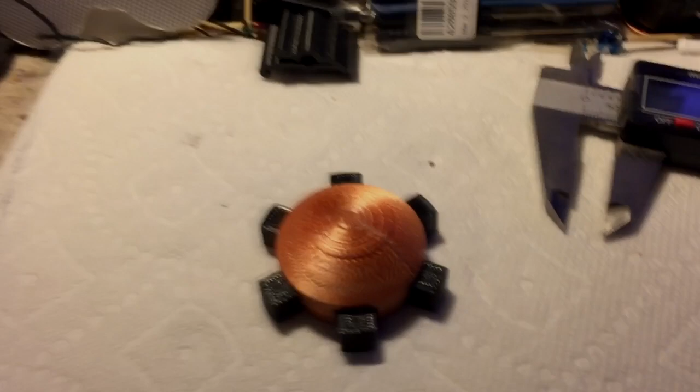Okay, on to finishing the pommel. This will be the last part of this pommel series, I guess, if you could call it that. And we're going to design things a little different. So as you know, our pommel now is solid. It's not a cap like on the toy. In parts 1, 2, and 3, we did the threads, we did the pommel, did the ring to fit over the lightsaber, and put it all together. Now we want to complete it.

So the next step in completing is building these little squares that come out of here. Now on the toy printed lightsaber, they're just glued on. So these could be easily knocked off. If you hit these hard, they're going to come off. It's just super glue, right? So since this is solid, the design idea is to make these go into the pommel farther to give it some strength. We'll still glue them in there so they don't slide out, but it'll give it some strength by going into the pommel.

Also, remember we scaled this from, I think this was 36 to 50, or actually I think this is 45 to 50. Anyway, 42. Anyway, we want to scale these up a little bit. So I measured these. These are 5 millimeter by 5 millimeter, and they stick out 5 millimeter. So what I'm going to do is make these 6 millimeter by 6 millimeter and make it stick out 6 millimeter. And that way it scales because we scaled this up. So that's what we're going to do. We're going to kind of keep it like that.

I may also do some rounding of these edges because this is going to be on your lightsaber, and we don't want to hit this and get nicked, right? So might round some of this stuff. We'll see as we do the design. Anyway, that's the idea. Let's get started.

Okay, on to completing our final pommel. Now, in the first segment of this video, I told you that these were 5 by 5. They're not. They're 9 by 9. My mistake. And they stuck out 5 millimeters. I don't want to change how far they stick out, but I do want to scale it up. So I'm going to just go 10 by 10.

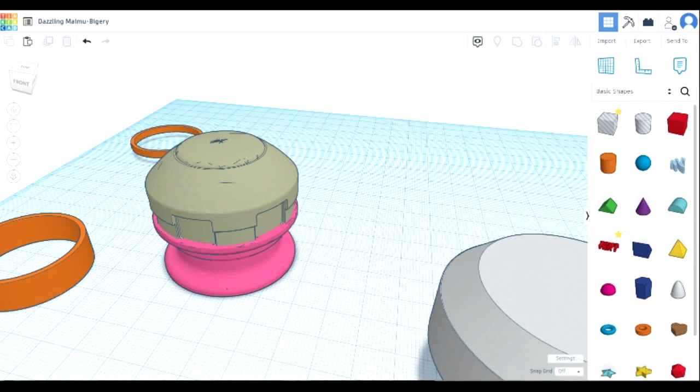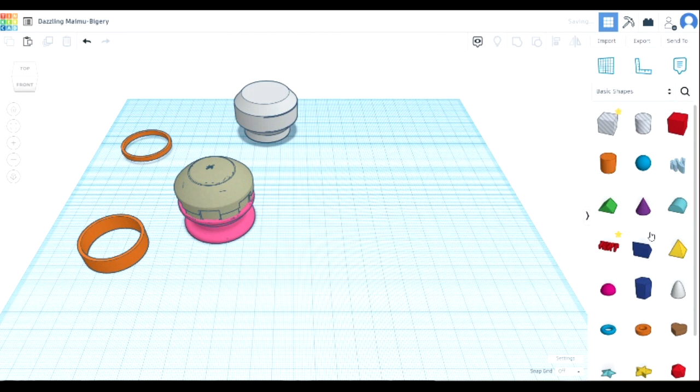All right. Now, there's 5 indents total. Is it 5? 1, 2, 3. I think it's 6. 6 indents total. Yeah. So that means in a 360-degree rotation, there's 3 of these. If you were to look at this as a bar going through, there'd be 1, 2, 3. Whoops. So what we want to do is, let's get this out of the way, we're going to do a trick. I call it a trick, but we're going to do this to make it real simple. So we're going to put a solid on here.

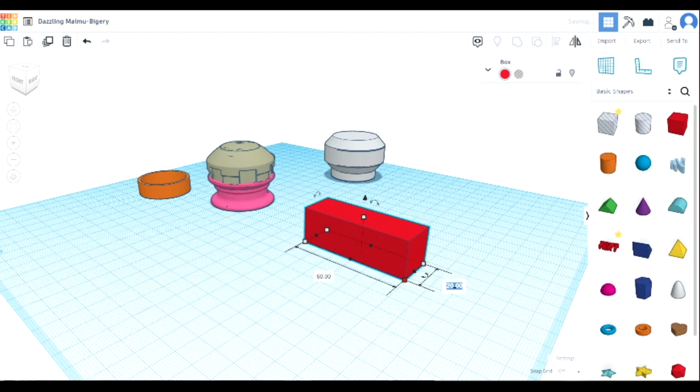Now remember, the diameter was 50, and we want the parts to stick out 5 millimeter on each side. So the first thing we're going to do is make the length. So 50 plus 5 on each side is 60 millimeter. All right, then we said we want to make this 10 and 10. And there's our first bar. And if we were to put this through here, you'd see that it would go right through and stick out 5 millimeters on each side.

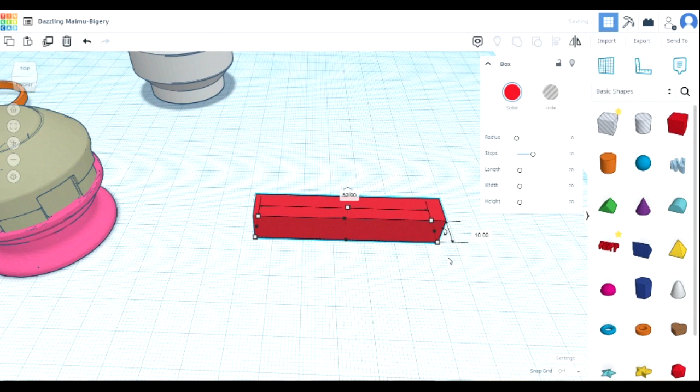All right, great. Now, I said I kind of wanted to round this, so let's take advantage of some of the tools Tinkercad has. So let's put our steps up so it's smooth, and then we'll just start to bevel this guy. Let's see what it looks like. That's pretty good. Now, the way the bevel works is it gradually goes back. We don't want to bevel it back into our pommel, so we don't really want more than about 5 millimeters. If you see, if I do this, it becomes like a pill shape, right?

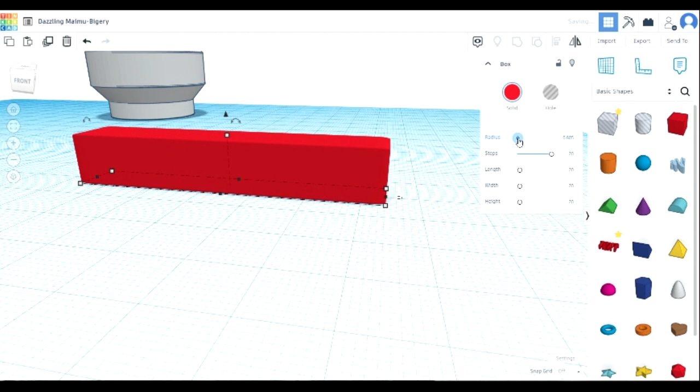So we want to do it just enough so we get a nice gradual bevel, but it isn't too deep into the pummel, leaving a gap. I think that'll do it, and you see it did it on both ends, so I think that's good enough. That gives us a little bit of a rounded edge on that.

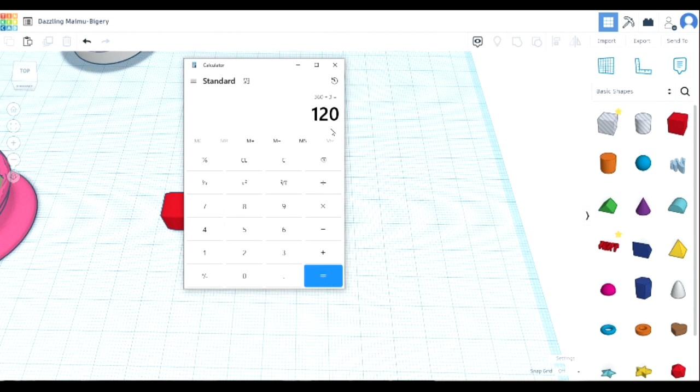Okay, so now we need to duplicate these and rotate them. So let's break out Mr. Calculator, even though you really shouldn't need it. 360 degrees divided by 3 bars. That means we need to rotate each part 120 degrees.

All right? So we're going to take this, we're going to hit the duplicate button, and I do it that way now instead of hitting Control-C, Control-V, because it puts it right on top of the other one. That way we get perfect rotation. So you need to deselect and then select, so you're only selecting one of them. When you duplicate, both are actually selected. So if you don't do that, you'll wonder what happened to your part.

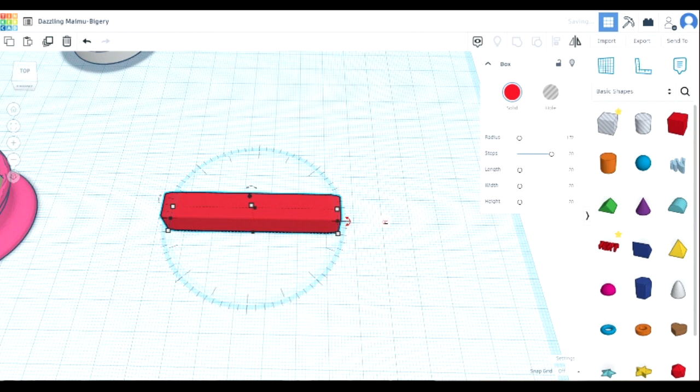Unselect it, select one, that way you've got one. Now we're going to come over here to rotate, and we're going to rotate 120 degrees. And there we have it. All right, now we're going to select this part.

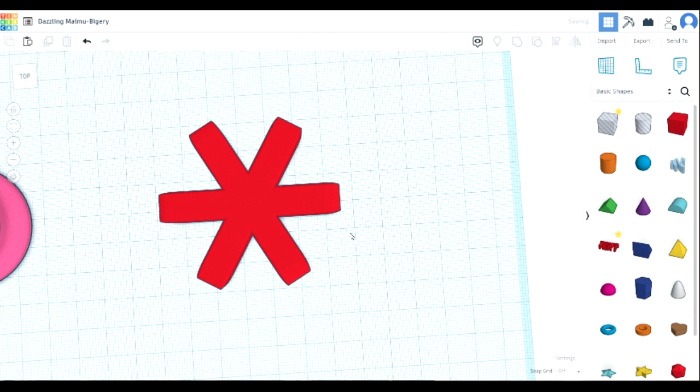We're going to duplicate again. We're going to select one of them. And once again, we're going to rotate 120 degrees. And look at that. We've now made this perfectly symmetrical. All right, I'm going to group all these.

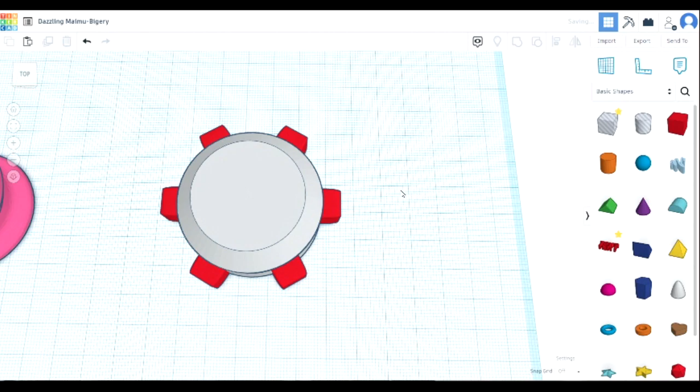And you'll see if we bring our pummel in, and I'll just go ahead and drop it below the build plate for now. And then we do a center. Bingo. All evenly placed around. Not a lot of work doing one by one and trying to get it evenly placed. And we've got our decoration on our pummel.

All right, so I'm just going to undo, get the pummel back over there. All right, so now we've got this. So this is actually going to be our part. I'm going to unzoom. So I'm actually going to put this to the side, but I need a duplicate of it. Why? Because we need to make holes in the pummel. Actually, we're not done with our part. Pardon me. We would never be able to get these parts into the solid pummel.

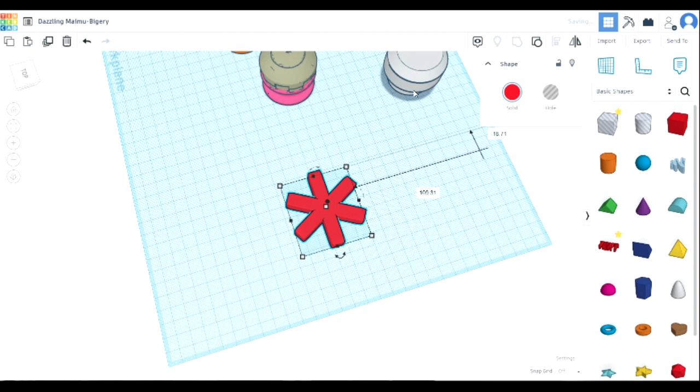So what we need to do now is, let's get another circle out. Actually, I'm going to make it a hole. And we need to separate them. So how far do we want them to stick in the pummel? First, let's bring up the sides and put it in here. And obviously, we need it bigger. Want it to stick into the pummel a little bit, but not too far.

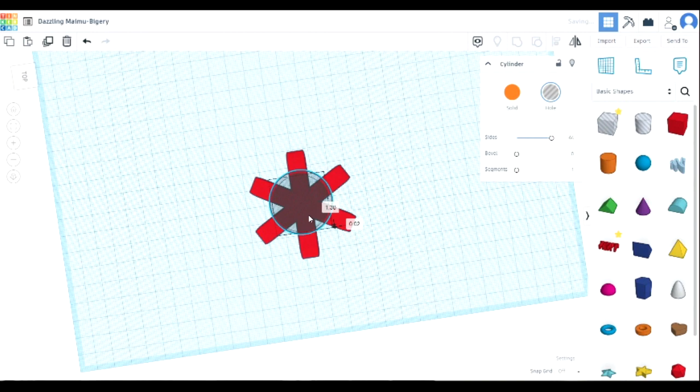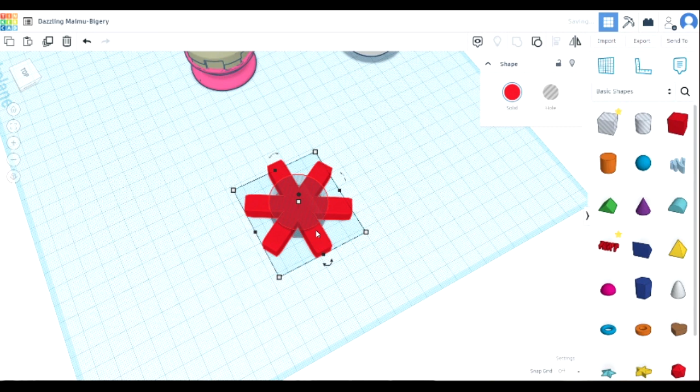All right, let's go ahead and we can lower that a little bit. Don't need all that. Okay, let's center these parts and combine. Now let's see how far they do stick into the pummel. Wait for it to finish. The more and more stuff you get on your build plate, the longer some of these commands take. So that looks pretty good.

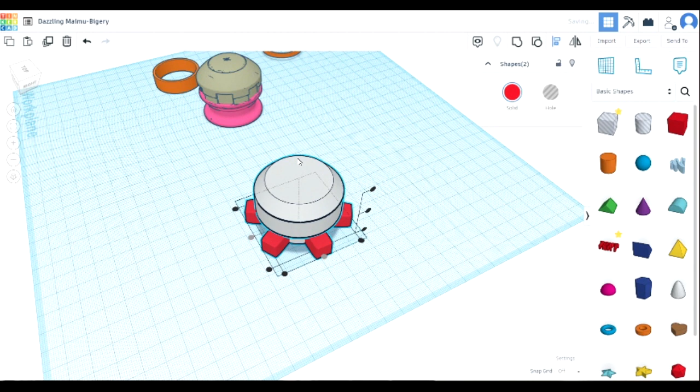Let's see how far it would stick into the pummel. So let's center. Or align. Okay, drop the pummel down. Get an idea. Now what I'm going to do is I'm going to make the pummel transparent so I can see how far they stick into the pummel. That's quite a distance. That should be pretty secure. Could have made it maybe a little bit bigger and have them not stick in so far, print less material.

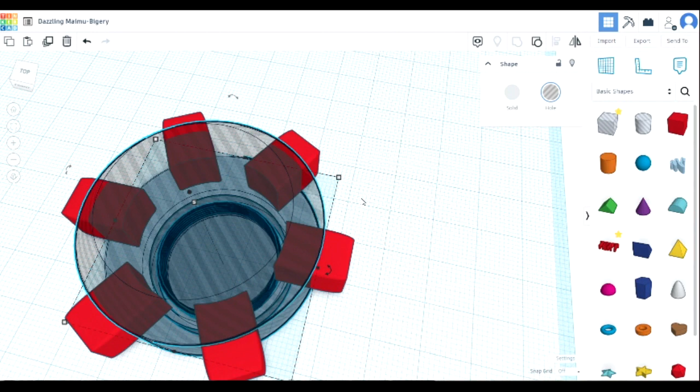Tell you what, let's go ahead and do that. So we're going to select this part again. We're going to hit ungroup. Let's see, how big is our circle now? It's 32. Let's make this 34 by 34. Okay, center, align, like so, group.

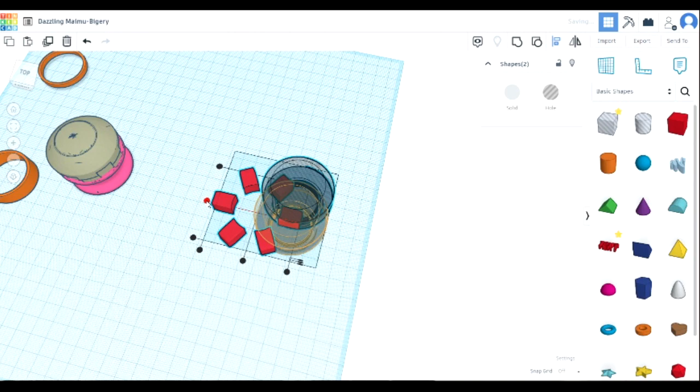Again, more stuff you do on the build plate. That's why, in my opinion, it's better to do piece by piece on different build plates so you're not slowing yourself down waiting for things to complete. So let's go ahead and align. And let's have a look. Yeah, I could keep from going in a little farther, but I think this is going to work out. I think this is going to be fine.

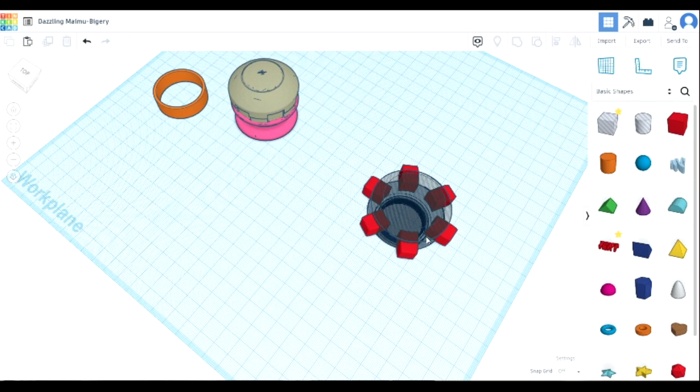It's not that much plastic for those little parts, but you could make that circle even smaller so that they go in, but we're going to make them secure, all right? So we got our pummel. We can go ahead and make that a solid again. We've got our part, which is all combined, so we can stick that aside.

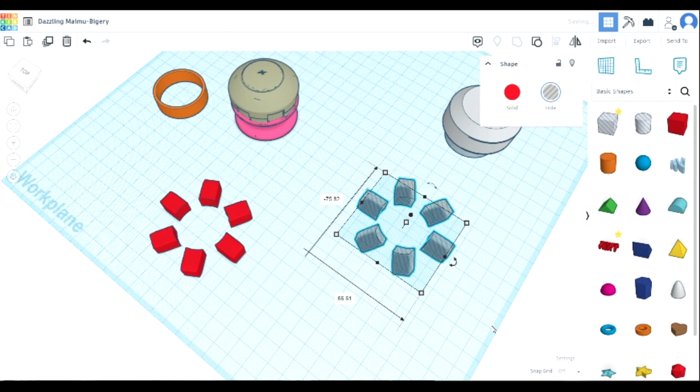Now, I need a copy of this because now we got to make holes in the pummel, right? So let's copy it, paste it. This will become a hole. Now here's the deal. Once again, when you're 3D printing things, you may get a little bit oversized here or a little bit undersized on the hole, and then your part won't fit in the hole. So what you want to do is increase this a little bit, just a little bit.

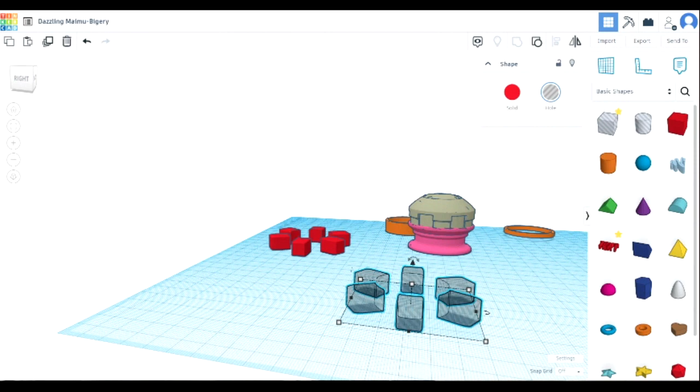So if we increase it up, it will be good, but if we increase it to the side, these will become longer, etc., and we won't get what we want. We need to increase the whole thing. So what I'm going to do is I'm going to ungroup, and move our hole. Whoops. Come on. Move our hole out of the way. Ungroup. Guess I didn't have that ungrouped.

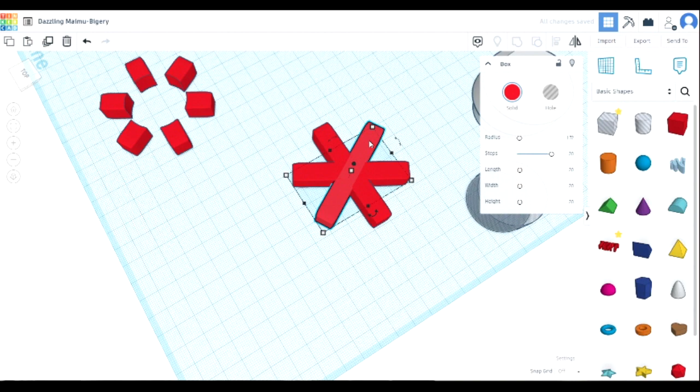Move our hole out of the way. Then we're going to ungroup each of these bars. We're going to ungroup this whole thing and delete these bars. All right. Then we're going to unbevel this because we don't need the holes to be beveled.

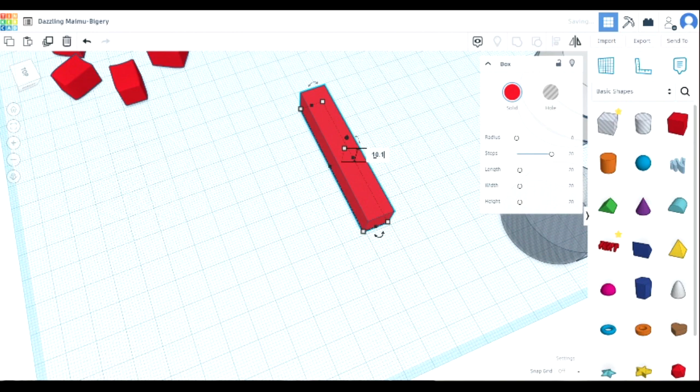All right. And we're going to make these slightly larger. So we're going to make this 10 point... should I do 1? Let's do 10.1. Length doesn't change. We've got to make the height 10.1. And we're going to repeat the operation we did before.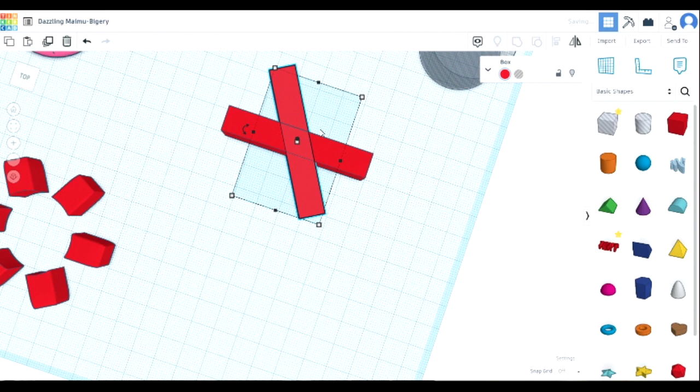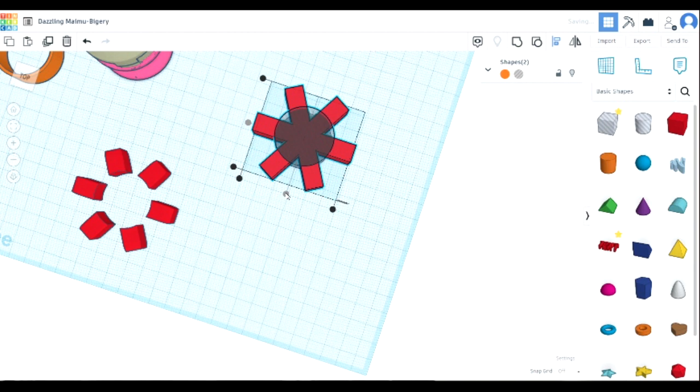Again, we don't need them beveled, so we're going to hit duplicate, select one, rotate 60. Okay. Duplicate, select one, rotate 120, combine, and merge our hole back in by aligning. That way the dimensions are the same. And then we combine again, and we make this a hole that's now slightly larger than our parts by 0.1.

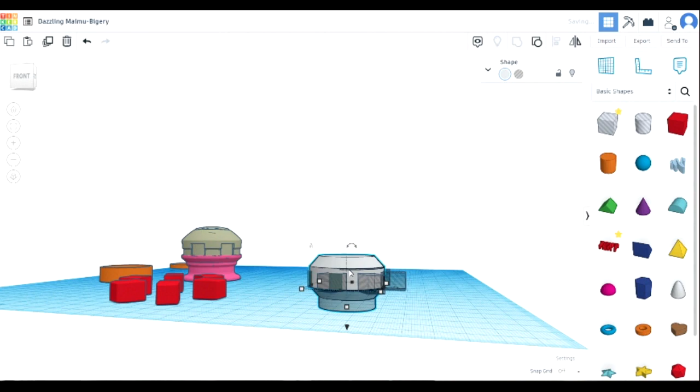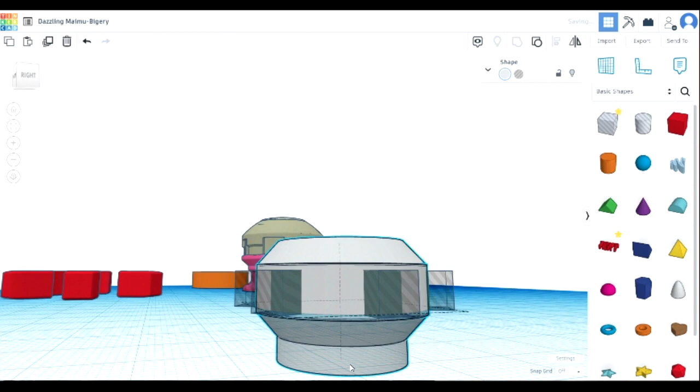Okay, now we need to put them in the pummel. Let me get home here. So we're going to take our pummel and we're going to lower it down and split the difference between the bevels. First, let's align. Okay, we're all aligned. But as you see, we're sitting at the bottom. So now what we want to do is raise our pummel or lower our pummel and basically split the difference. I'm just going to eyeball this. You can calculate it out, the distance between here. We need to go down a little bit more.

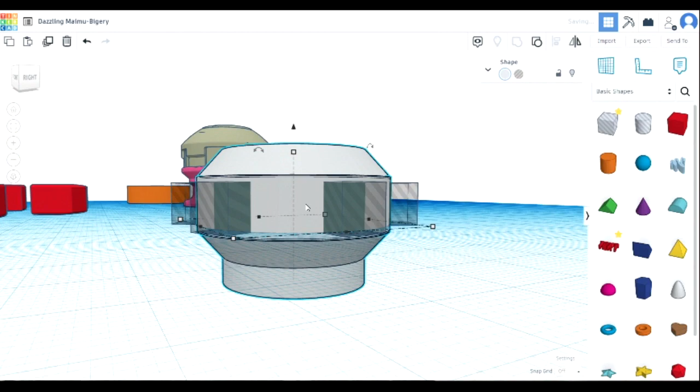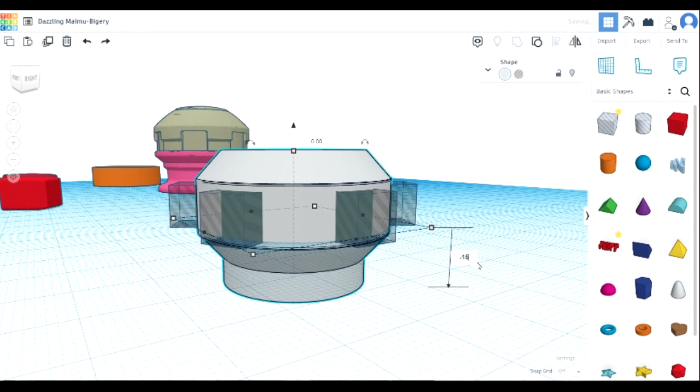Actually, let me recenter here. So we need to go down a little bit more, I think. Up a little bit. I don't know, it looks pretty good to me. It looks pretty good to you. I think down one click. So where are we at? 14.98. Just make it 15, see what that does. Oops. We're minus 14.98, so we want minus 15. Yeah, that moved it down a little bit. That looks pretty even to me.

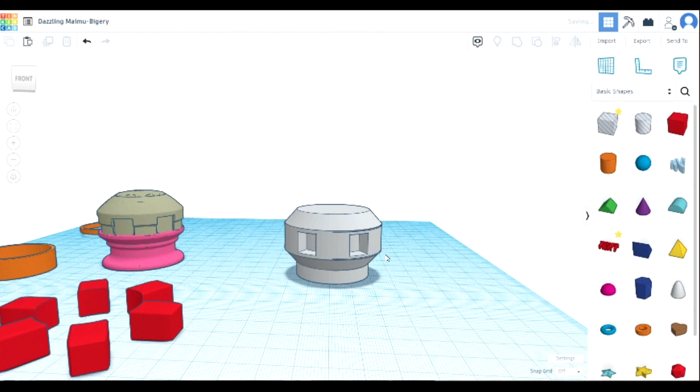So here we go. We once again combine. And let's recenter, re-level on our build plate. And there's our finished pummel and our finished parts. As you see, there's a back wall, so when they go in, they'll glue right in. Because we did this in circles, these parts are curved. And we know inside here, this is going to be curved. If we make this a hollow so we can x-ray view it, you can see these are curved. So I can literally take that part and put it in here.

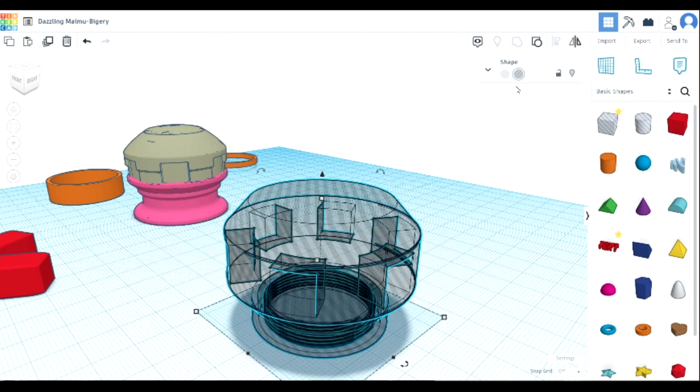Now, once again, I always say test what you're doing before you print the whole thing, right? So how do we test that? Well, we'd have to make a little test part to do it, which we can do. I'm going to put the pommel to the side. And what I'm going to do is take this, I'm going to ungroup. I'm going to ungroup again. And I'm going to copy one of these out. Okay. And then we'll just regroup all this again so we don't get lost.

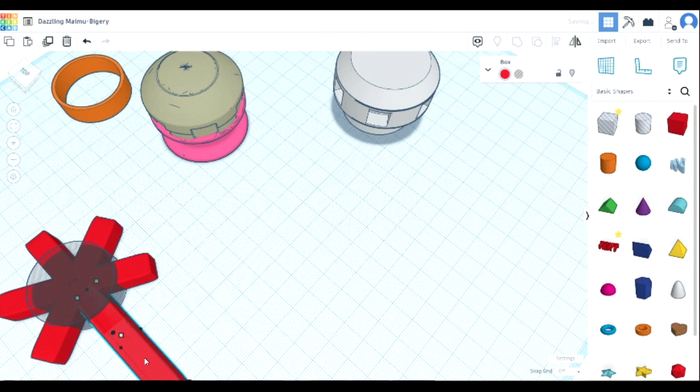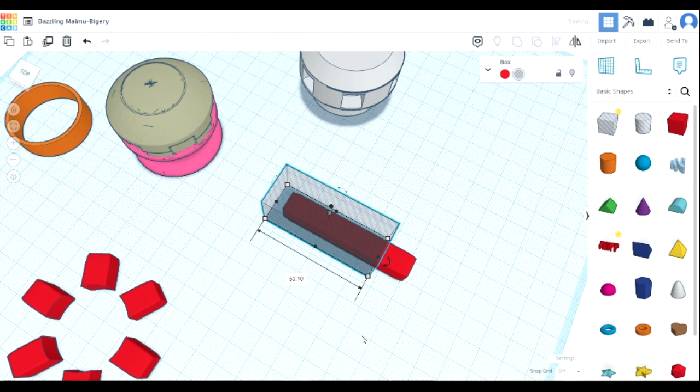Actually, I grabbed the wrong one. Ungroup. Alright, that's what I wanted, so we'll make a copy. Now we'll regroup. Now what I'm going to do is take a block. I'm going to slice this short, since we just need the little part. Okay. This is just a test fit. To do a test fit, we're going to group. Now we've got a part we're going to print.

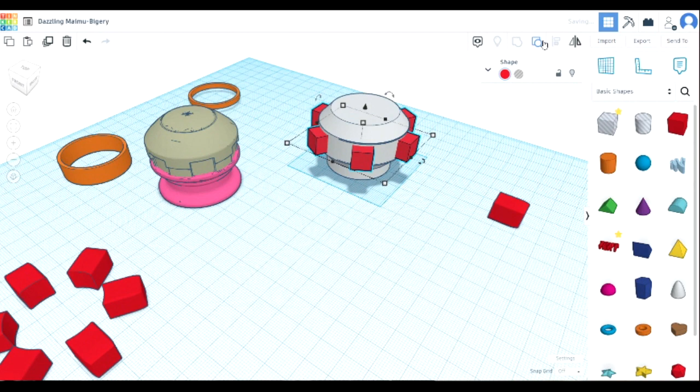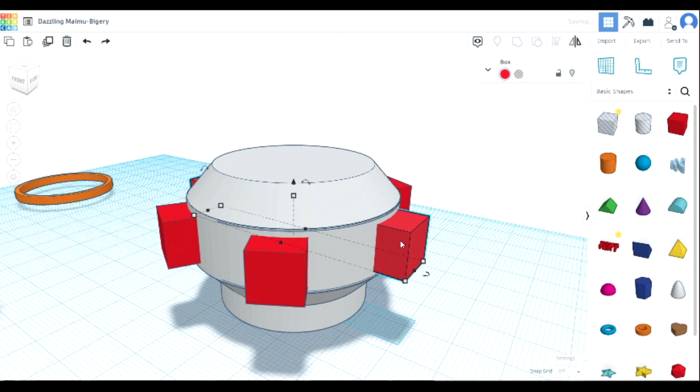And then for testing this, let me ungroup this. We said we made these bars. Ungroup that again. Ungroup. Recenter here. Come on, why can't I ungroup? Ungroup. Nope, didn't want that. So I should be able to grab one of these. We said we made these bars a little bigger to make the holes bigger, right? So I'm going to grab one of those. I'm going to hit copy and hit V. Pull that out. Okay, let's regroup all this.

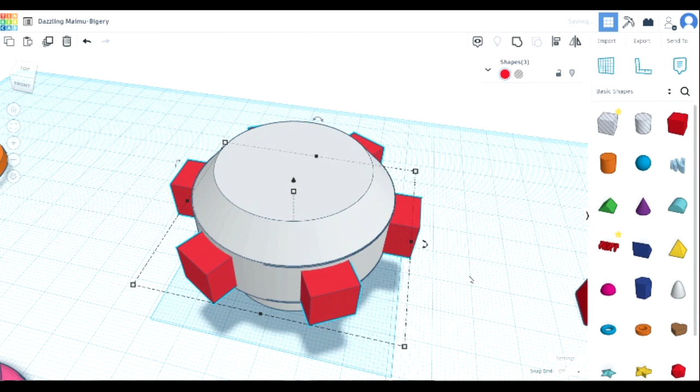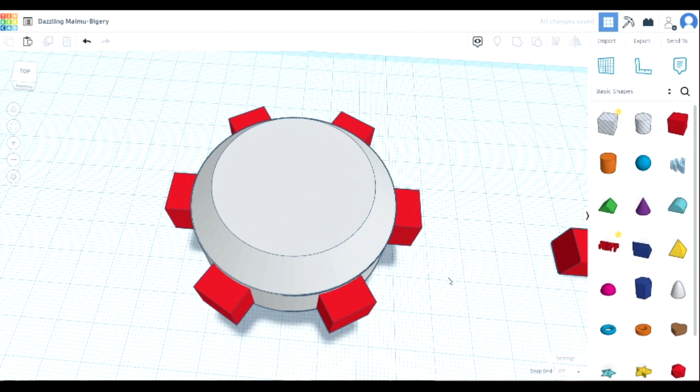Actually, we need to make this hollow again. So, got to do this the hard way. I should have made a copy before messing with it. That's one thing about making a copy. Okay, those are grouped. We need to make that a hole. Must be still grouping. Didn't get that grouped. Bear with me, group. Select, make it a hole. What the heck's going on here? Did I ungroup? I must have ungrouped. All right, I'm working too fast and I'm getting frustrated. Group. Okay, let's wait for it to finish. That's what I think's happening, I'm going too fast. And that's not grouped. Unbelievable.

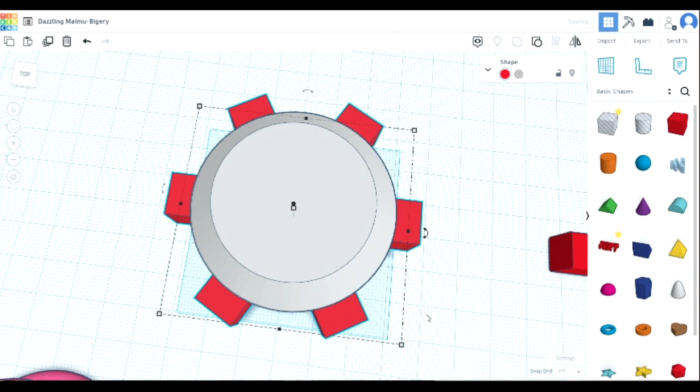Group. There, I see them all glowing. They look like they're all selected this time. Yeah, all right. And now we make that a hole. I hit ungroup, hit back. That's what happened. Sorry, guys, I'm getting punchy here.

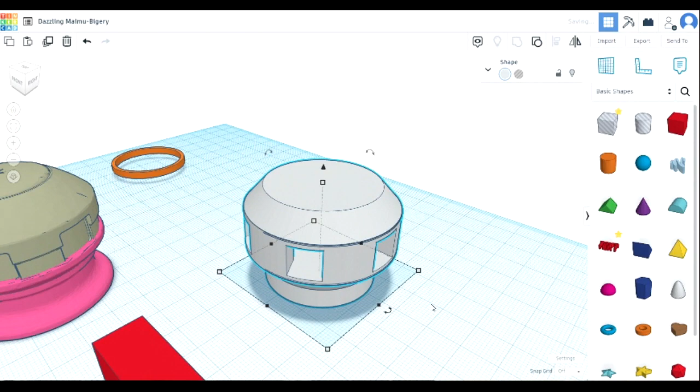We make it a hole, then we group it with the Pummel, and we leave our Pummel alone; next time we make a copy. Anyway, so where I was going was we now have this part that's an exact copy of that, and we have this hole. Let's make it a hole. So now we're going to grab a solid, and we're going to take this, and we're going to rotate this upright.

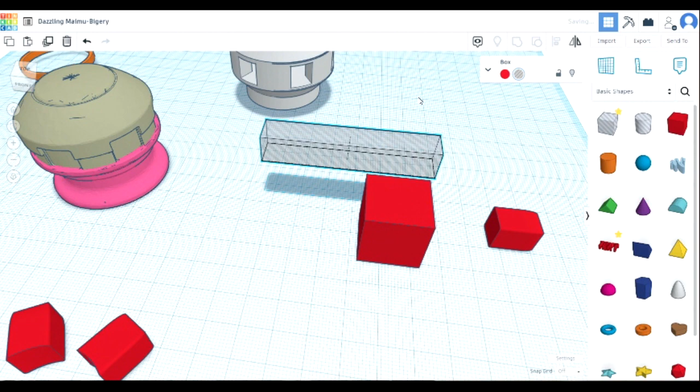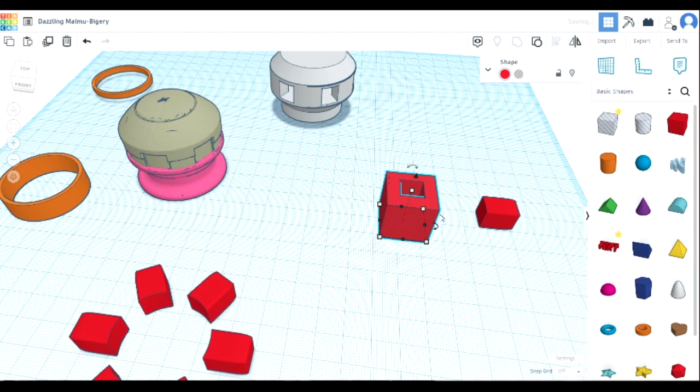Okay, put it in the center of the block, and then we're just making a little part we can test print, right? Bring this up so it's not on the build plate. Doesn't need to be that long. And how big is our square? Don't want to print too much plastic. That's good for a test print. All right, so then we're going to group. So we see it's got a bottom on it. We have our part.

And we're going to export both of these and do a test print to make sure this fits in that hole that we made as 10 millimeter, right? I could have, instead of ungrouping this, I could have just made it 10.1, 10.1. But what the heck, we used the parts we used. So I'm going to export these, and we're going to come back and make sure they fit.

Okay, as always, I say print a test part before printing the whole thing and then be discouraged. So this was the one where the hole is 10.1 and it's way too loose. Well, I wouldn't say way too loose. Put it this way, it would work, but it's loose, all right? And we want a good fit, make those parts glue in easy.

This one, I just went ahead, I said, the heck with it. I made the hole 10. I didn't add anything. And it turns out, because my printer's dimensionally correct, this actually is a good fit. It slides in and out, but doesn't wobble. So, bottom line is we're going to go back and we're going to make the holes 10 millimeter.

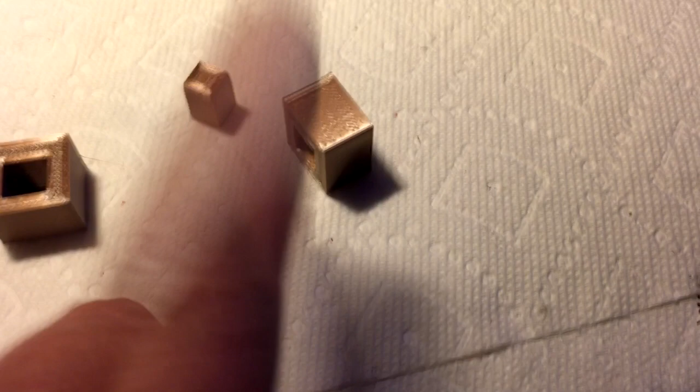Now, maybe it's because I printed it this way instead of this way. But here's the deal. If I print the Pummel and these are too big, I can always downscale these. It's a simple print. Whereas the Pummel's a much larger print and we wouldn't want to waste it. So, with that said, let's go back into CAD, fix things up, and then finish the Pummel.

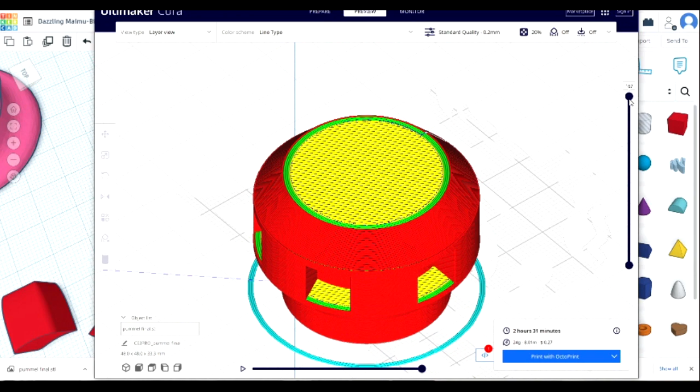Okay, so real quick, before we print this, I've got the black filament loaded. I don't think I'm going to do supports in here. Because remember, the part's going to go in, so I don't care what the hole looks like. But if you look, when I get on the first top layer above those holes, the printer's going to print the lines this way. I think it'll do the rim first though. Yeah, I still think I can get away without supports in there.

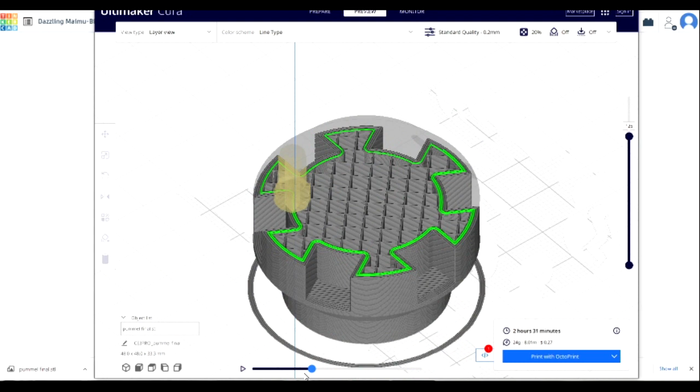Let me see what the print head does. So this little row down here is nice. You can see what the print head's going to do, right? So we're going to go to the next layer, 126, and we're going to watch what the print head does. I think it's going to do the perimeter. Yeah, it does the perimeters first, the inner infill, and then it's going to do the top layers.

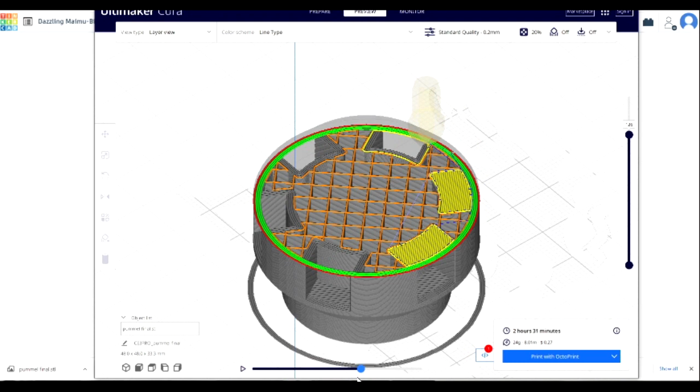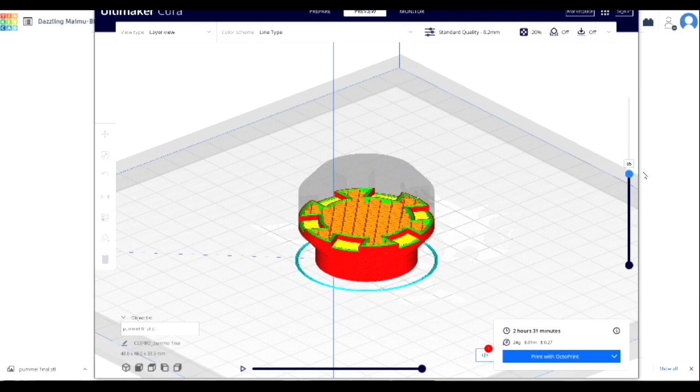And even though it's 10 millimeter by whatever depth I've got there, it looks like it's going to be fine. Yeah, I can get away without supports in there. Hate to dig them out anyway. All right, again, we try to do this without supports, but this is why you always want to load your part and inspect these things to determine, do you need supports? How big is the gap you're trying to bridge? Is there anything funny inside the model that's going to print weird or cause it to mess up?

And we are looking good now. So anyway, let's get these printed and take a look at the final Pummel. Okay, so real quick before we finish off the Pummel, I want to show you something. So when I first went to print these Pummel spikes, I guess you could call them, I just took the 5, and I'll show you in CAD and Cura. I just took the 5 and printed them.

Well, I forgot that I tapered the ends, and so here's what that did. On the build plate side, this was not touching the build plate, so we got this nasty looking edge. And then of course on the top side, we didn't get the cleanest edge either because it's the top layer, right? And it's also beveled.

So what I did is, instead of printing all 5 flat on the build plate and slicing it, I cut them all out, made one, rotated it in Cura so that this end was on the printer's build plate, and this was the top surface, which gets hidden inside the pummel. And if you look, we've got some really clean looking sides.

So things don't always translate from CAD to the slicer to printing without you being extra careful to realize how you're printing them. Otherwise you could wind up with not good looking parts. So I'm going to show you what I did real quick in CAD and then in Cura, and then we'll finish off the pummel.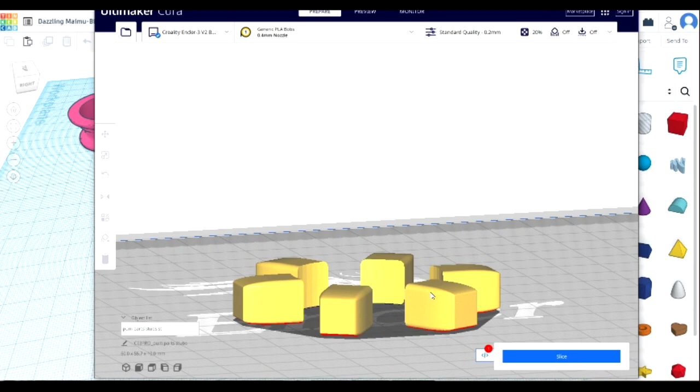Okay, so what I did was, as you know, I had all 6 of these, and I just exported all 6 and put them on the slicer build plate. As you see, if you look at the bottom where it's red, that is not going to be touching the build plate, and that's when I showed in the example that it looked ugly. And again, these are now the top layers, and we want these sides all around to look good.

So the best way to do that is, I blocked off all the others, leaving one. Then you do a combine, and that eliminates them. And then you just export this one, right? So you export it, and you're done. So I'm going to clear the build plate here.

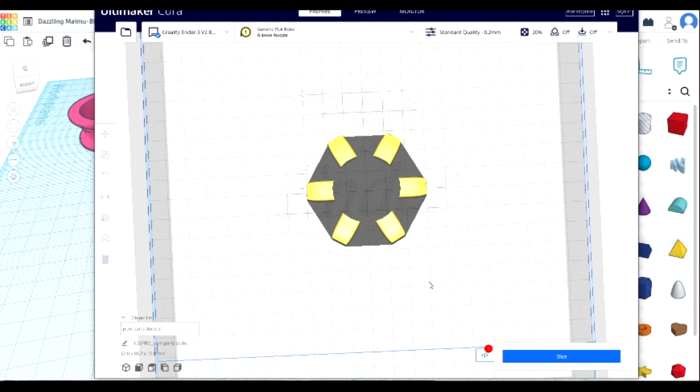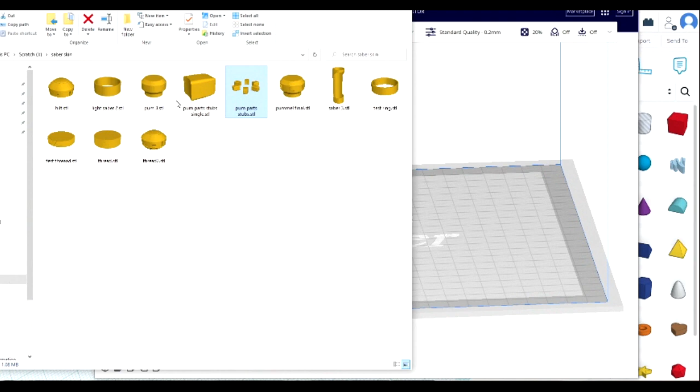So now when I'm going to print a part, I could rotate this face down in the CAD, but I want to keep my original parts, right, in case I want to do something else. So in Cura, I like to rotate in Cura. I find it the best way. So we're going to import the single one now. And as you see, it's still on its side, and it's still got an area not touching the build plate that will make it look ugly.

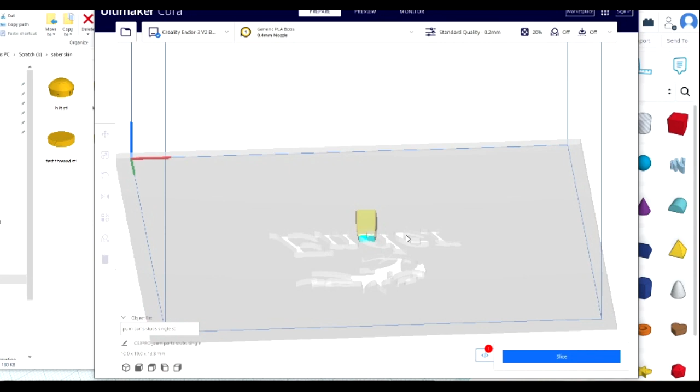So basically, you just grab it, go into rotation, grab the proper axis, and this is why I like doing it, because it then drops flat on the build plate. As you can see, we're all blue here now. And basically, there's 2 ways to do this. Now, if you want the best surface possible, you want to print these one at a time. But you could come in here,

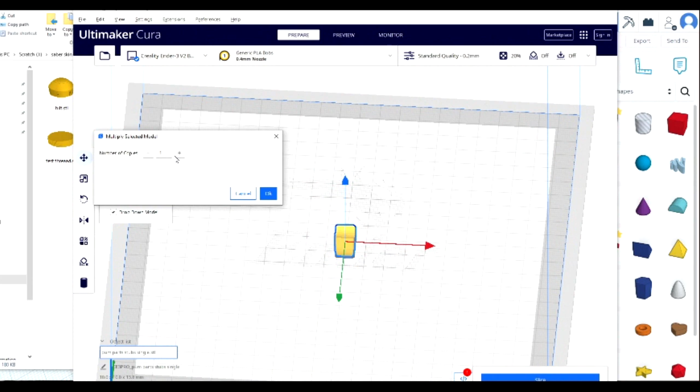select it, and go up here to edit, and multiply selected, and we want 5 more, and click OK. But let me show you what happens here. So let me move this back up. When I slice this, I've also got in my Cura, under prepare preview, showing all the lines, showing where the travels are, meaning we're not putting down filament, but how the head travels.

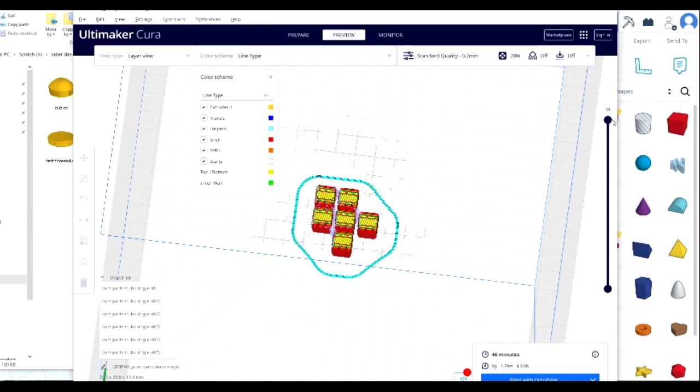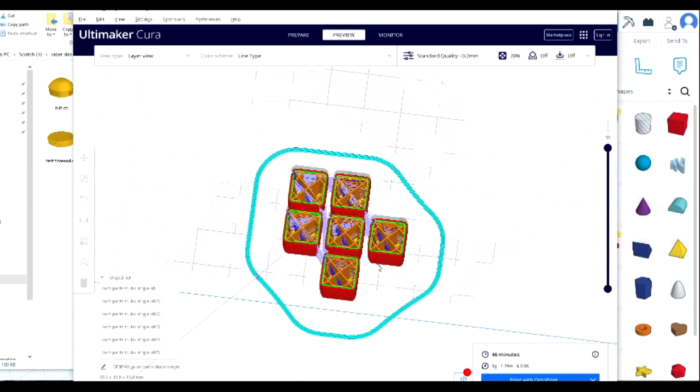And in preview, if you look, see all these blue lines? This is the head finishing off somewhere here and then transitioning across here. You can get stringing, and it can put little marks on your print where the head traveled over to this other part. So this is why I like doing one at a time. Yes, it's slower than doing all 6, but if you want the best possible surfaces, it's better to eliminate all those moves between parts that can cause zits or little ticks on your print.

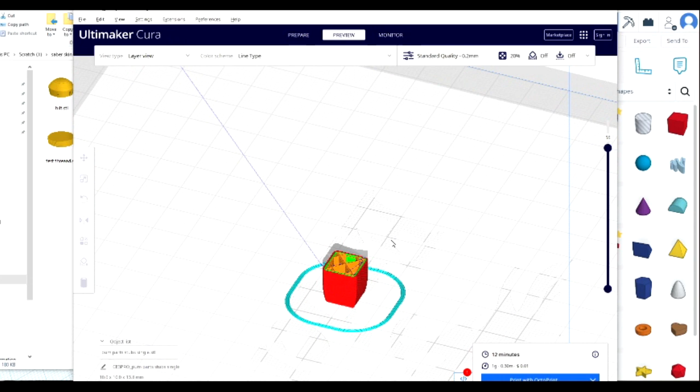All right, so I like doing one at a time, so I would slice this and send it to the printer 6 times, and we're going to get a nice part as I showed. All right, so that's it, and we're going to print these final spikes and take a look at the pommel. All I got to say is, wow, that came out great. It fits like a glove, screws on there perfectly. Look at the pommel spikes. They're great looking, really printed well. The pommel itself printed well.

As always, you've got a Z seam. On black, it's not usually that much, but it just came out great. I mean, the print came out great. It printed great, in my opinion, and it just looked really good. So that's the first start at the skinning. We got the pommel done. Reason I did the bottom first is I'm going to move up.

Again, we're going to make these in pieces, right? And so we want to start from one end and wind up where we want to go, mainly because this screws on and it'll support keeping the other skins from sliding off the saber without having to screw things in or glue things, right? So it can all be easily removed. Anyway, I thought this pommel came out great. Looks great to me. What do you guys think? And we'll continue skinning.